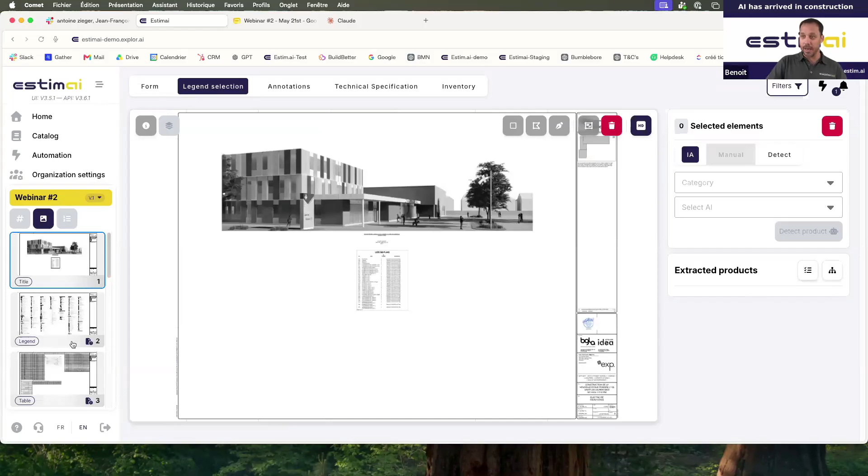To show you the process, I'm going to do detect icons and launch this. I know there won't be many results, but I'll show you how to work around this. Then I'm going to go back to the other project to do the same thing because the legend was done. Sorry if it goes a little fast, I'm trying to show as much as I can. I'm going to take a sip in a second and ask Marie to launch another question, but I just want to launch the other detection first.

So validate first that my images were captured. Go to detect mode, power outlets, and then I'm going to do detect icons. So the tool will actually launch the detection for all of these images.

So now we'd like to know which trade of construction are you in? Are we talking mainly electrical, HVAC, interior systems? It could be general contractor. It's important for us to understand where you are. At the end of the presentation we'll show you the roadmap, because the idea for this product is to support a general contractor, so having all of the trades developed - and we already have a few so far. There are upcoming webinars that will address other trades.

So meanwhile, I'm just going to quickly do junction box. Oh, okay.

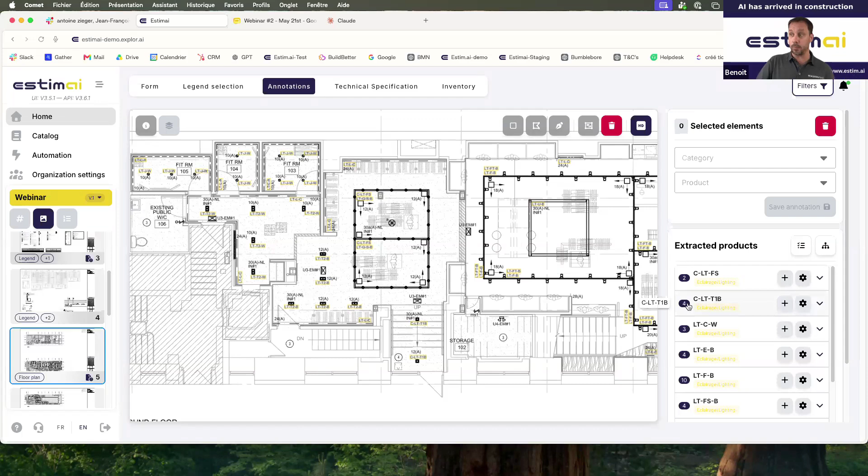What we have done is something to accelerate the task of takeoff, right? So the estimator is still there to drive the process and then to validate the process. There is value for an estimator to come within the tool and add any missing lighting that was not properly addressed by the tool.

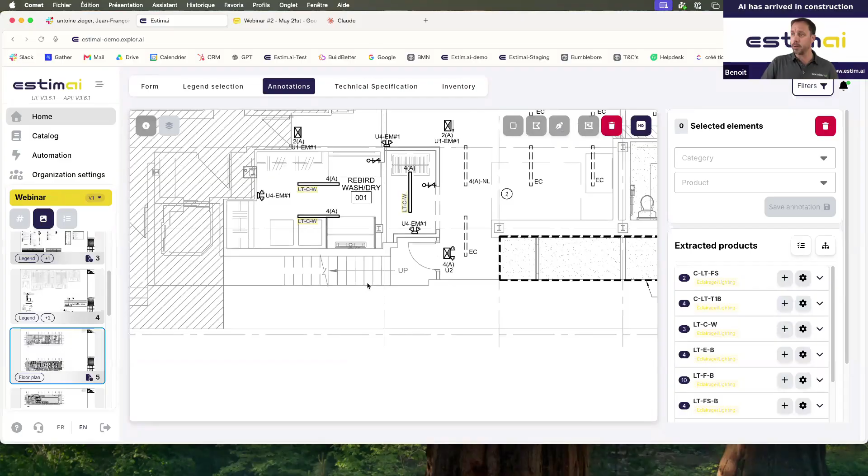I'll show you how to add. There's a little bit of less success within the power outlets, and this is emergency. So far it looks so good. It looks good on what the detection was done, and I think there's another like so.

As you saw, I launched a few processes already, right? Just as a recap, I launched the legend process, I validated that process, and then I launched my detect icons for those images that were created within the legend process. On the table process, there's no need for validation.

Okay, the validation for the identifier is not necessary. So we do the two steps at once, and we create the bill of material.

We take all of this information coming from the schedule, and then at the same time we launch the detection. So it's not a two-step process, it's really a one-step process.

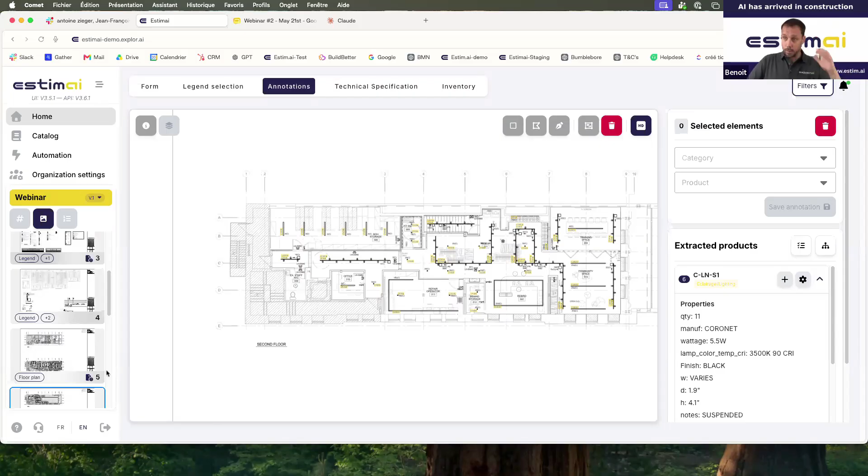So now back to here. As I mentioned, if I show back to the original legend, the symbols here are much more bold, if I can use that expression, than what we had in the legend. So there's an important difference for us, and we're not able to detect properly. You saw the lines are much thinner here than what was in the drawing. This happens a lot, where the legend is a bit different, somewhat similar but not identical to what we see in the drawing. So how do we address this?

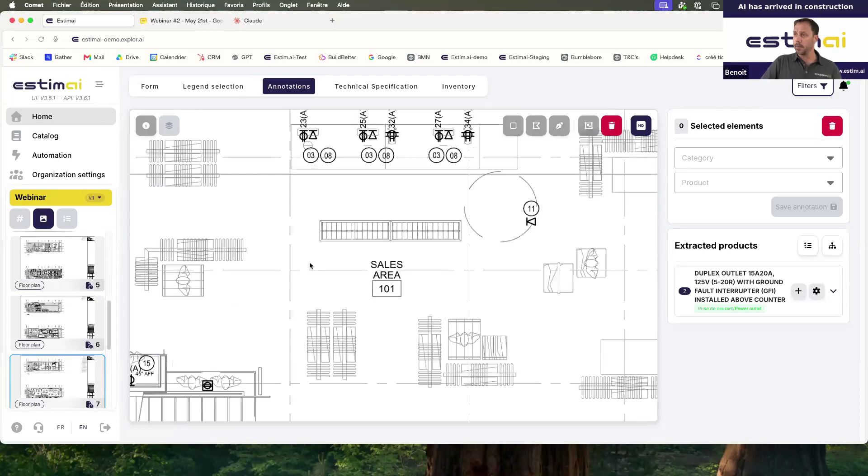I'm going to do a few manual processes here. I'll come and try to find a somewhat clean image, so I'll use this one. I'm going to do a quick manual box. And I need to use - sorry, I'm not in the right section. To create this, I need to be in legend selection. As I mentioned earlier, all my prompting needs to be in that section. So I'm going to go manual, power outlet.

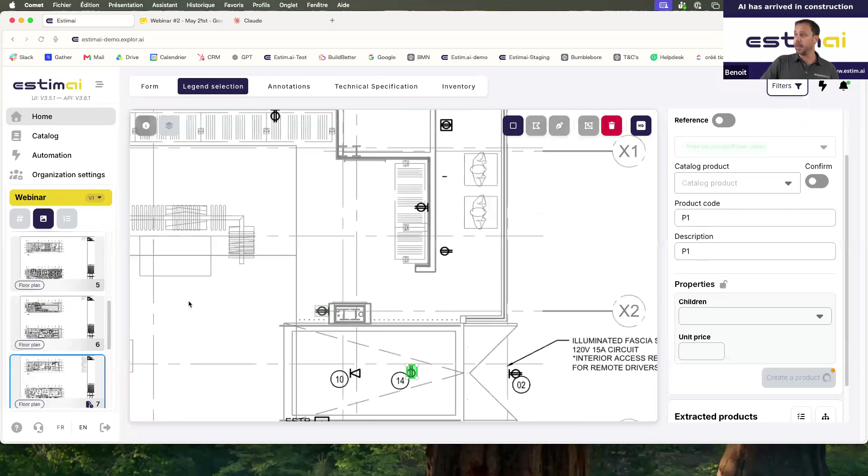I'm going to do the same here for this one - manual power outlet. In this case, I'm going to call it P1. Create the product. And I think there's another one here.

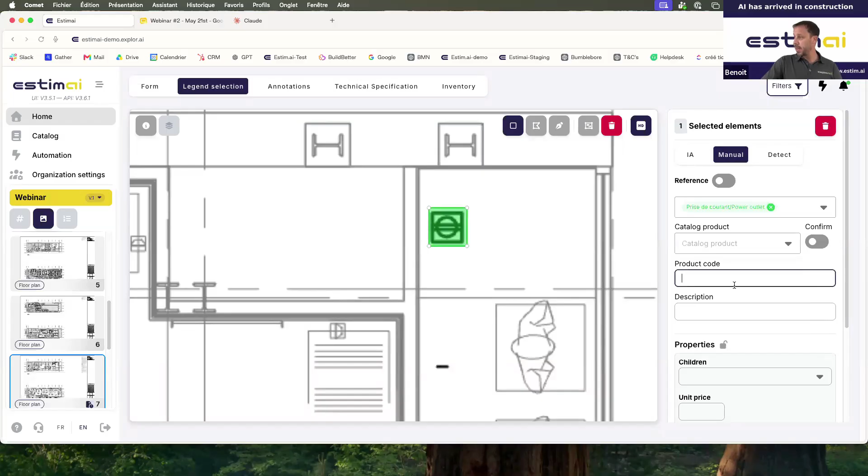I can use my zoom to make a better job here. So, manual power outlet. And I'm going to go, not from the catalog, I'm just going to call it P2. Create the product. I think there's one last one that I want to create.

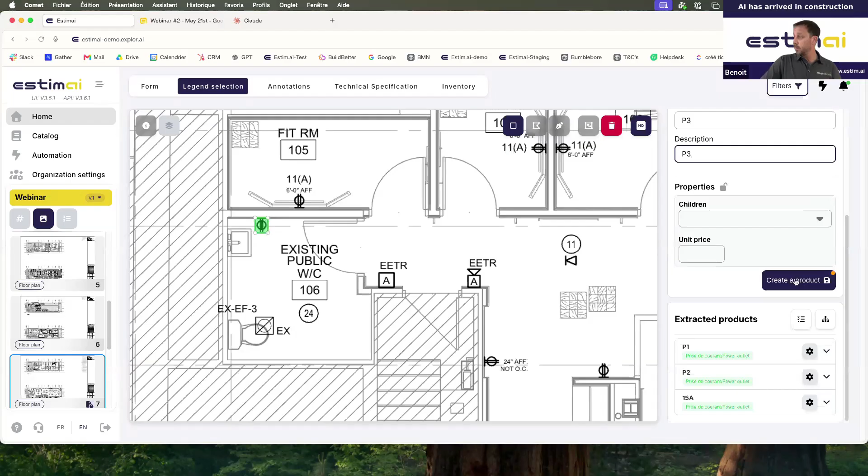If I recall, there's one with a darker symbol inside, probably on a different page, right here. Oops, bit of a box. I'm going to call this one P3. Manual power outlet, P3. Create product. So I have 4 products within this page.

So what I'm going to do now is go into detect mode. I'm going to take my multi-selector here to go and select the 4 that have been created, and I'm going to launch detect annotations. I'll let the tool work, and we'll be back in just a second within this project.

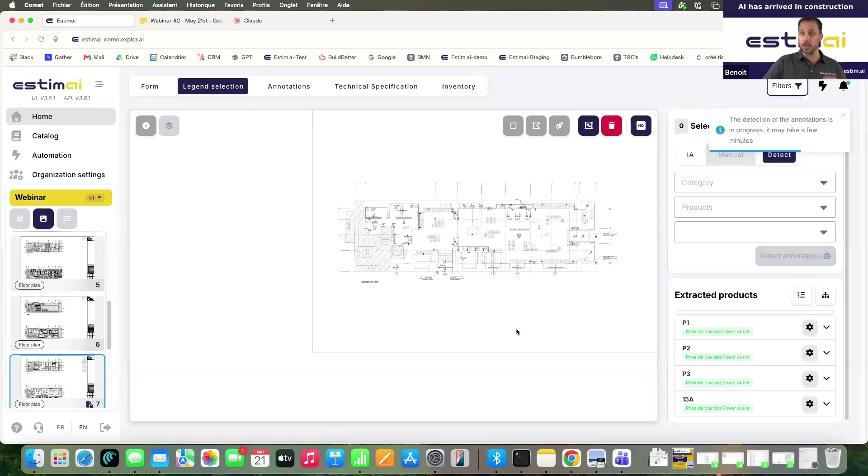I'm going to go back here to show you. I've also launched a table process. If I want to see the results here, I need to go back to the legend selection, so you can see that I've taken all of this information, and the same thing with my legend, which I launched a detection on now. So let's go back to my lighting floor.

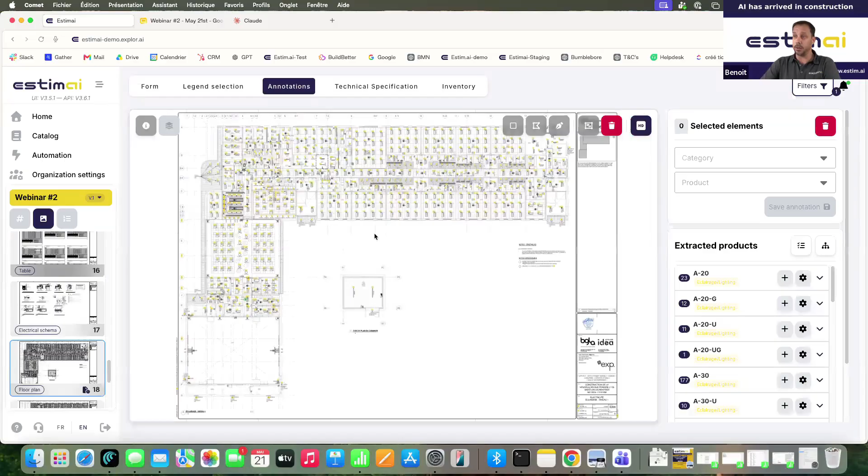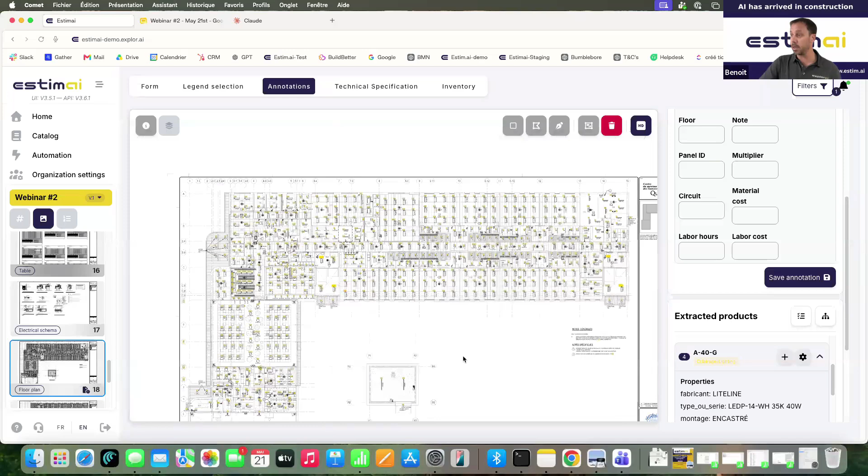So all of the yellow dots that you see here are all of the lighting that were detected within the tool. These are the numbers, the count actually for all of these that were within this tool. I could - I'm just going to show you, you can have multiple pieces of information that you can put, it could already be programmed within your catalog. Just one key feature I can show you: if I was to select all of these here, I could say this is floor 1, type A unit. And it could have a multiplier, where my type A unit, I can find this 4 times within my drawing.

Sometimes this is typical for unit 1, 2, 3, and 4 - they're not going to repeat it, so you need to have that multiplier function. By saving this, I now have multiplied all of these for the time being.

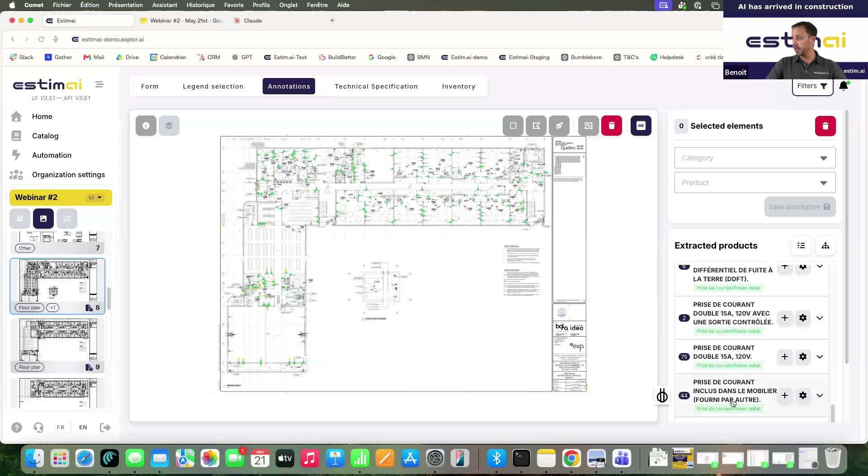And now go back to the power outlets. So the power outlets here, we have detected 39, another 30 here, 70 - so there's probably 220 outlets that were detected within the tool, but we're somewhere around 90%, 85 to 90%. So you see here, this one is not added, so I can just come here, and by selecting this, I can just come and add one.

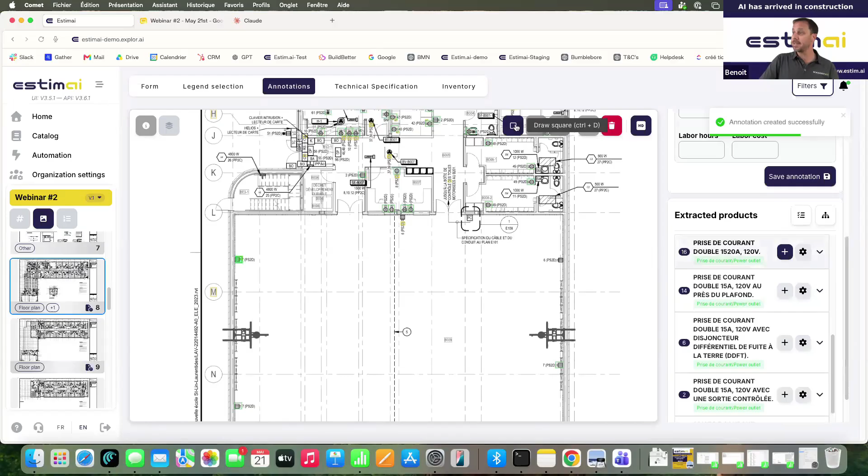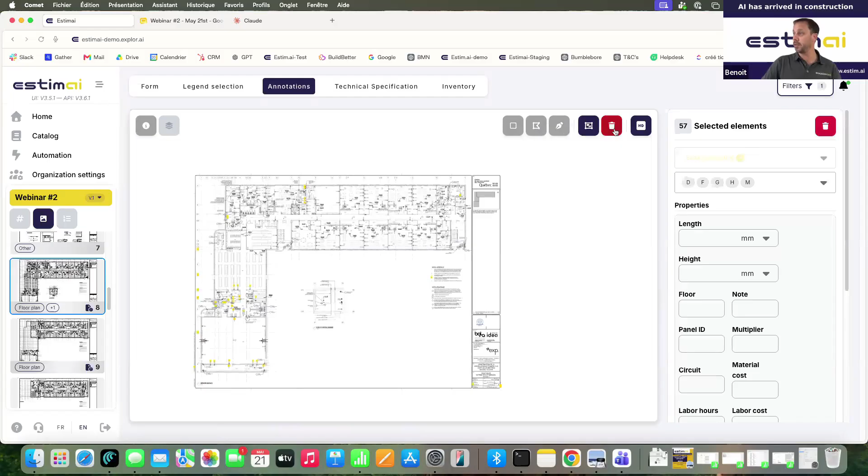As a limitation of the tool, there are some lighting items that were called D, M, H - you see all of these letters were found by the tool. So I can use my filters in this case to come and just select my lighting category, and by doing so, I can easily come and clean the entire page, remove this because this is a service and not a lighting fixture.

Schedule. So I'm going to remove my filter. Then I have back to my power outlets.

Just to show you also that we can launch a batch detection when it's the same image that you find within the tool, as you can find within the legend, within the drawings.

So Marie, going to take another sip.

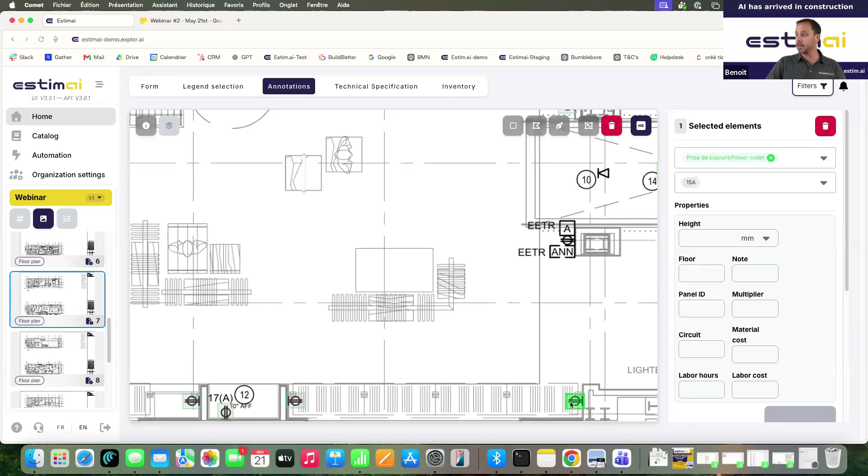This is maybe something I need to add manually. Let's go here, let's do that process. So that's this one here. I can just stop like this. Okay, so that's just the way to do it.

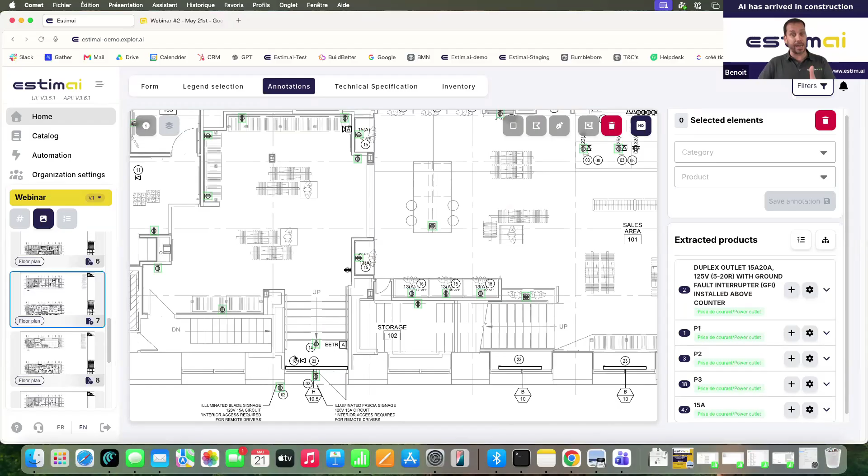This one was not cut, but I'm pretty sure that's because it was the legend, the first one that I created, so the tool will not use the legend as a count. In this case I use this image, so I just need to add it just like I've done before.

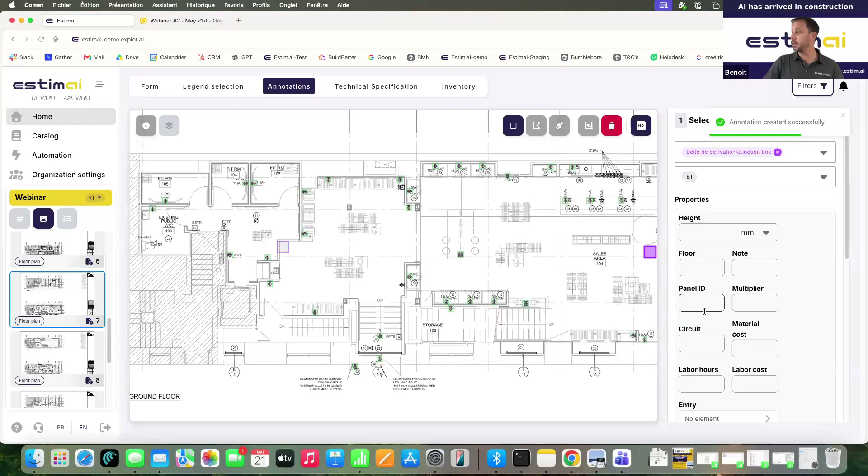So I'm going to use this page here to do the wiring. I'm going to show all of these products. I'm going to take one junction box here, and it doesn't really matter where I place it—I think you'll get the idea. I'm going to remove my plus.

Before I go, I need to make sure I put my plan to scale. Okay, so 3/16 to 1 foot is 1 to 64. I've done quite a few plan drawings already, so I know this, but if you were to multiply 3/16 by 64, you would get to a foot.

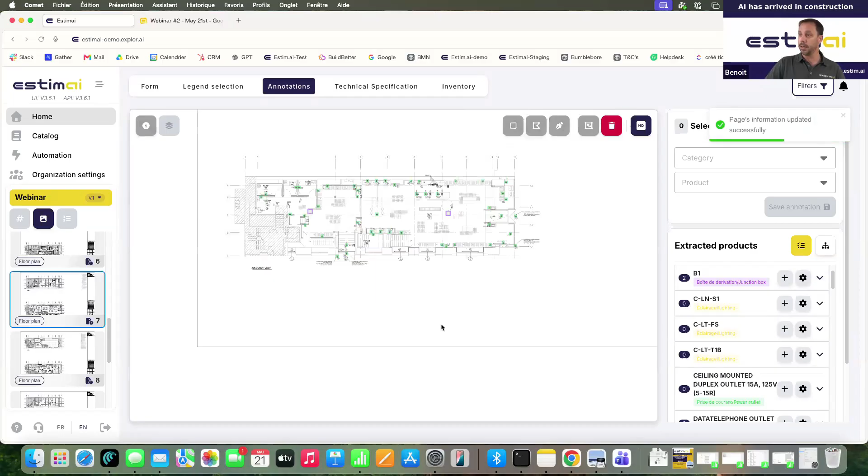So now this page is on level, on scale, and now I'll show you the first way to distribute your power or your wires within your plan. I'm going to go into cable, and if I add my recipe, my ingredients for a recipe created within the catalog, I could multiple-select different items, right?

Or select multiple items. So in this case, I could have a conduit, and this conduit needs to be on a support or on a tray, and multiple wires, right? So this is the recipe I want to build between my two junction boxes.

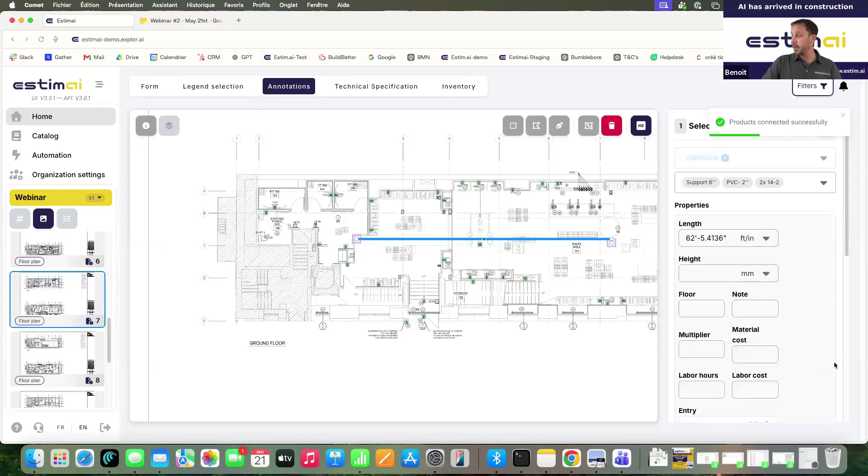Once I've done this, I can select from where I want to go to where I want to go and create links. Within a second, I have this here, and about 62 and a half feet of distance between those two junction boxes. Now my takeoff will include all three ingredients that I selected before.

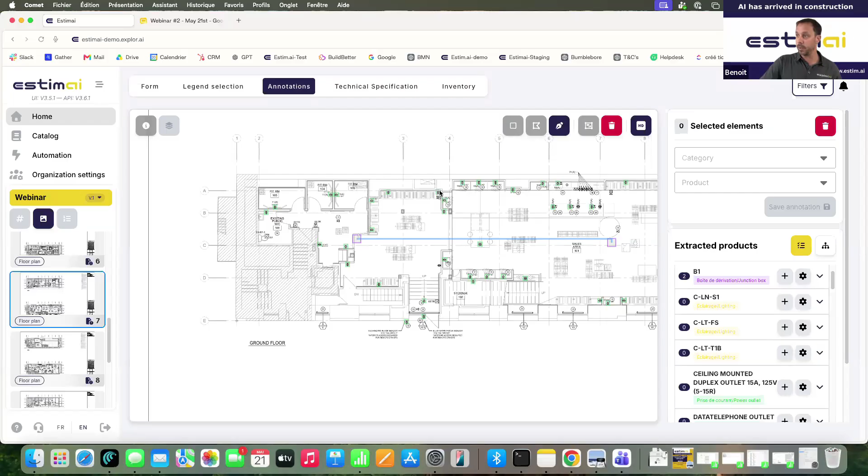Okay, so that's one way to do it. Then if I want to finish my circuit, I can actually draw from the junction box. It doesn't have to be that precise. So as you can see, I've selected from the junction box, I've done this circuit, and now I just need to tell the tool which type of cable I just used.

You saw me at the beginning create my 14-2. What I've done is incorporate this from my catalog, so I can now use this function. It could be a different wire for heating, or a Cat5, Cat7 for communication. It's the same tool—you just need to tell it at the end which wire you're drawing with.

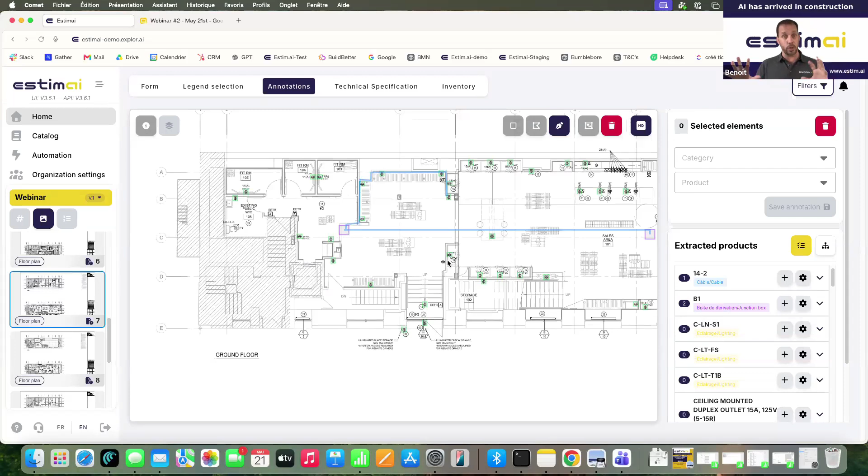So for now, this is the way we draw the wires, until we have something more automated where we'll take this information, 11A, 11A, and use AI to suggest a path for your wires. Then the estimator will have the flexibility to modify these as we go.

Okay, so now I'm going to go into inventory, but I'm going to take another sip. I've been talking a lot. So, Marie, what's the next one? What's the next question? The takeoff tool.

Yeah, thank you Maggie for that. We're curious—are you using a solution today to do your takeoff, or is it still manual using your own Excel sheet? If you don't mind taking a second, we're always curious to know our audience. Are people still on a manual process, or currently using another tool to do this task?

And then we'll go into the final part of this presentation, which is the inventory part.